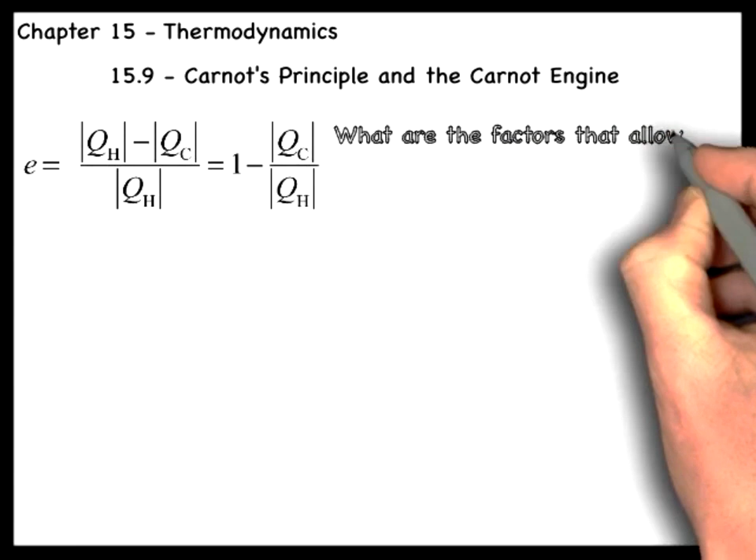In the previous chapter, we saw how to calculate the efficiency of a heat engine. What are the factors that allow a heat engine to operate with maximum efficiency? A French engineer, Sadi Carnot, proposed that a heat engine has maximum efficiency when the processes within the heat engine

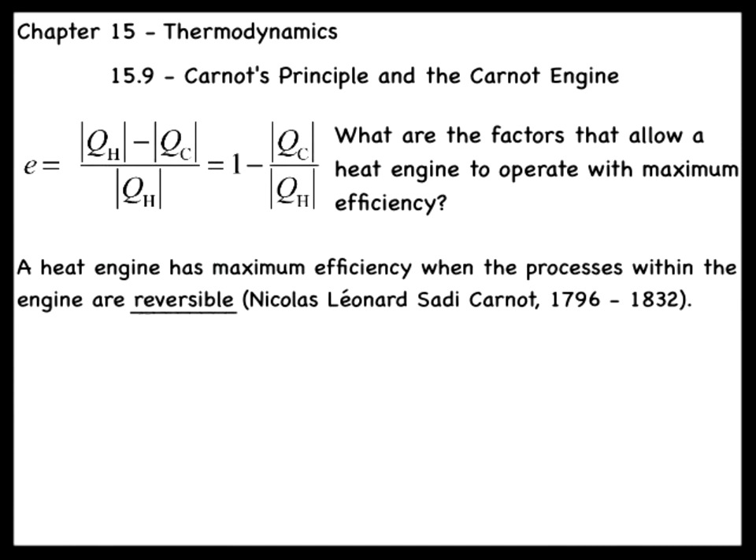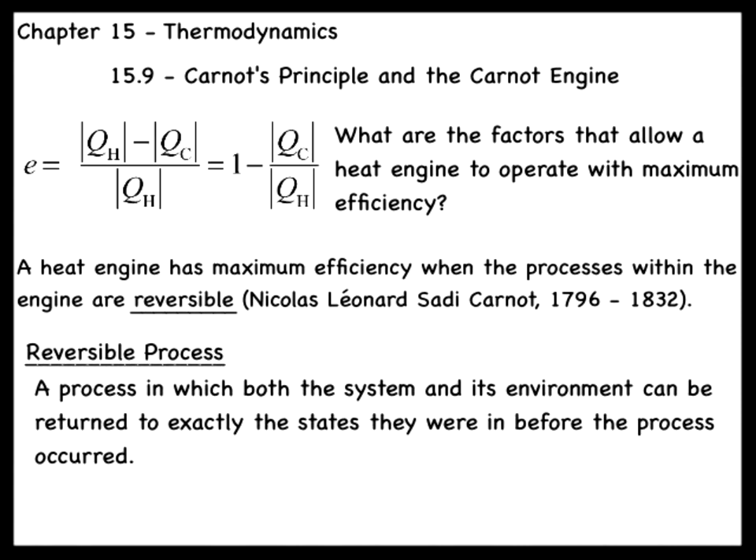are reversible. A reversible process is one in which both the system and its environment can be returned to exactly the states they were in before the process occurred. Therefore, a process that involves an energy dissipating mechanism, such as friction, cannot be reversible, because the energy wasted due to friction would alter the system or the environment or both.

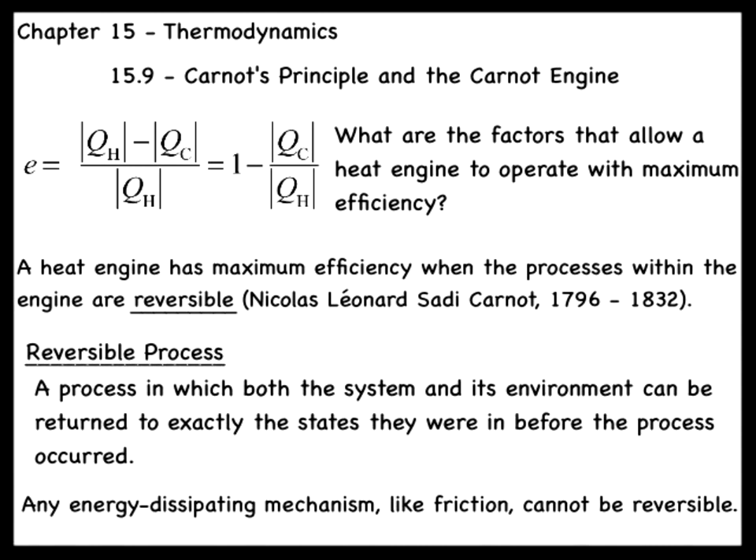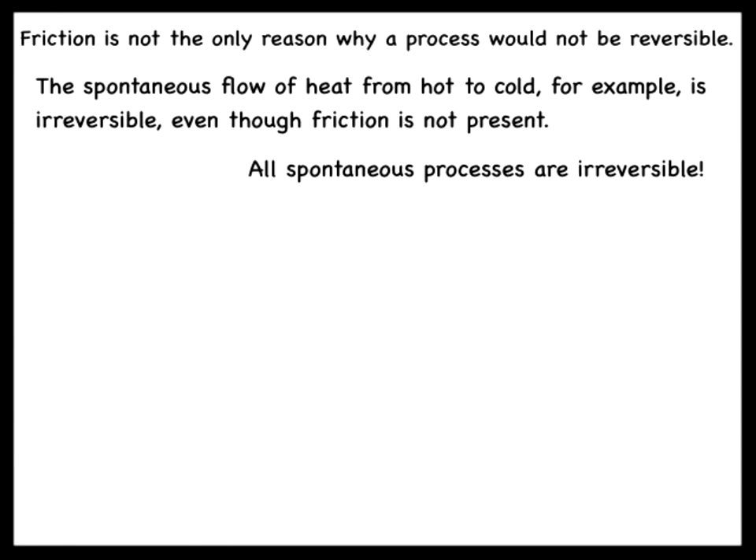Friction is not the only reason why a process would not be reversible. For instance, the spontaneous flow of heat from hot to cold is irreversible, even though friction is not present. In fact, all spontaneous processes are irreversible. An explosion of an unstable chemical and the bursting of a balloon are examples. No automobile engine is thermodynamically reversible, since friction in the engine exists no matter which way the engine runs.

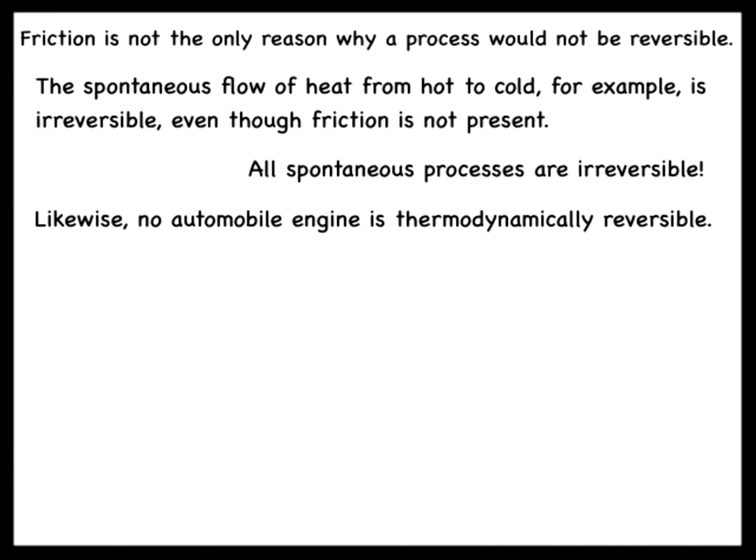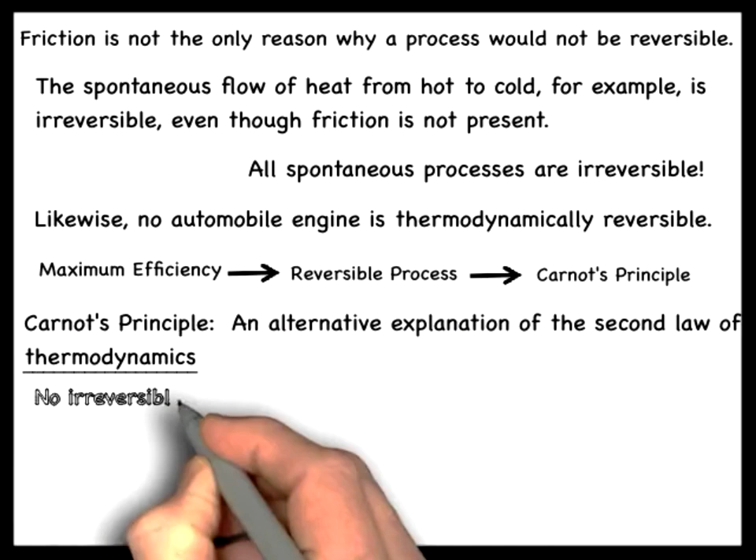The idea that efficiency of a heat engine is a maximum when the engine operates reversibly is known as Carnot's principle, which offers an alternative statement of the second law of thermodynamics. No irreversible engine, operating between two reservoirs at constant temperatures, can have greater efficiency than a reversible engine operating between the same two temperatures. Furthermore, all reversible engines operating between the same temperatures have the same efficiency.

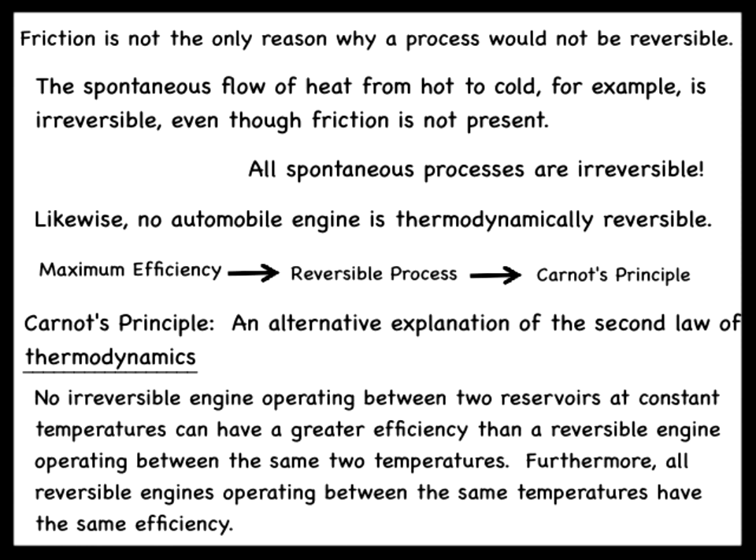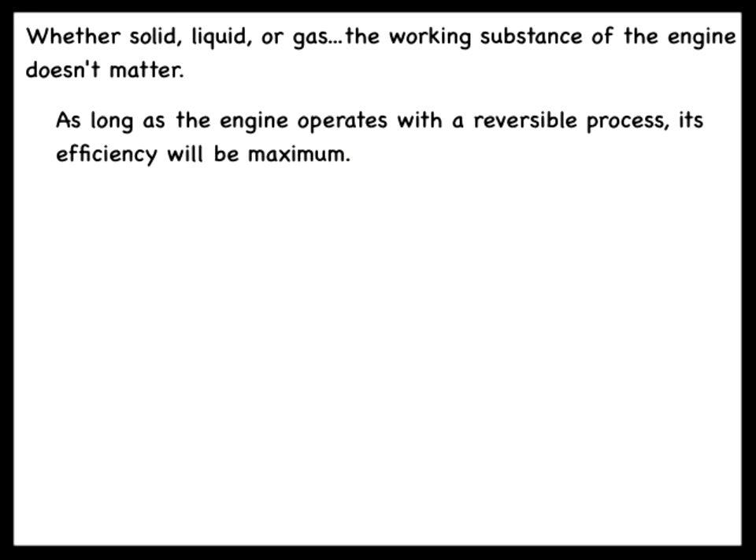Carnot's principle is a remarkable statement. It does not matter whether the working substance is a gas, liquid, or solid. As long as the process is reversible, the efficiency of the engine will be maximum. However, Carnot's principle does not state or even imply that a reversible engine has an efficiency of 100%.

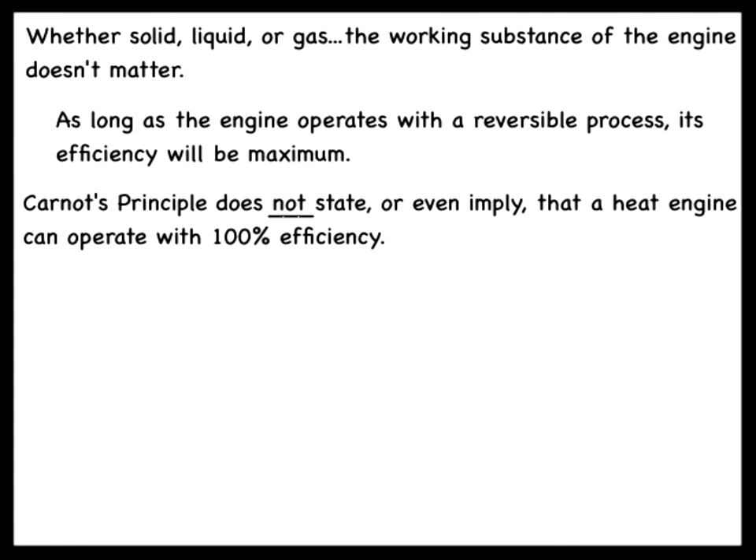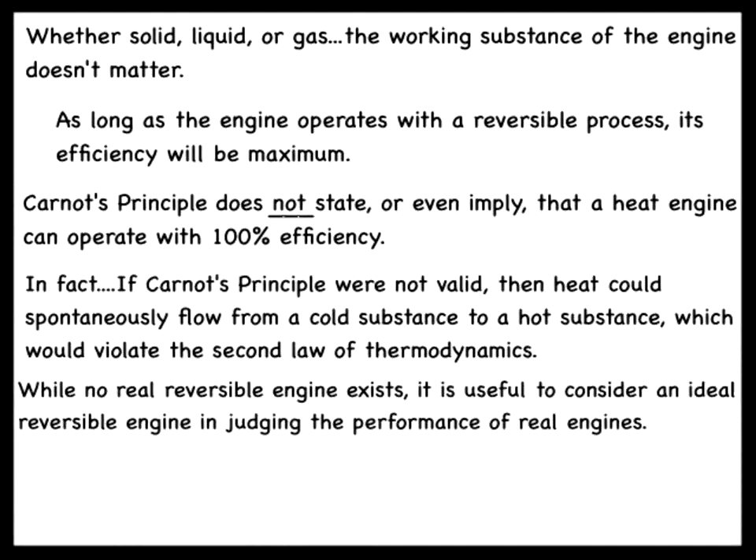It can be shown that if Carnot's principle were not valid, then heat could spontaneously flow from a cold substance to a hot substance, which would violate the second law of thermodynamics. While no real reversible engine exists, it is useful to consider an ideal reversible engine in judging the performance of real engines. The figure below shows a reversible engine, also called a Carnot engine.

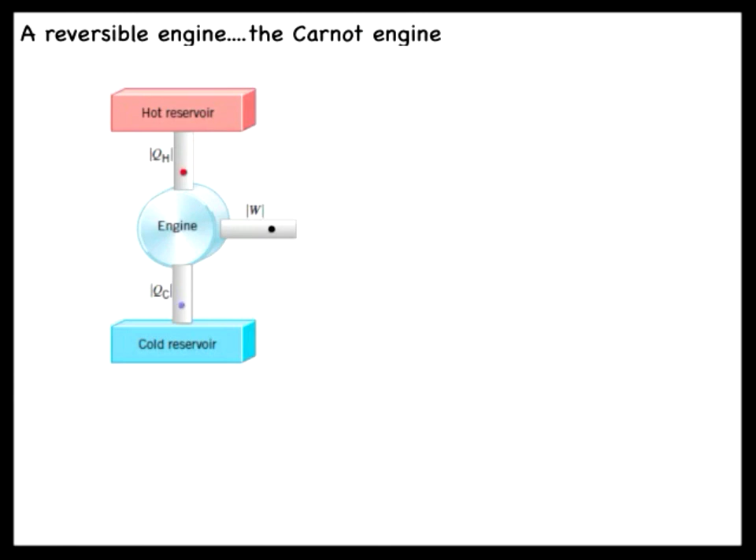An important feature of a Carnot engine is that all the input heat, QH, originates from a hot reservoir at a single temperature, TH, and all rejected heat, QC, goes into a cold reservoir at a single temperature, TC. In other words, none of the input heat is lost to energy dissipating processes like friction.

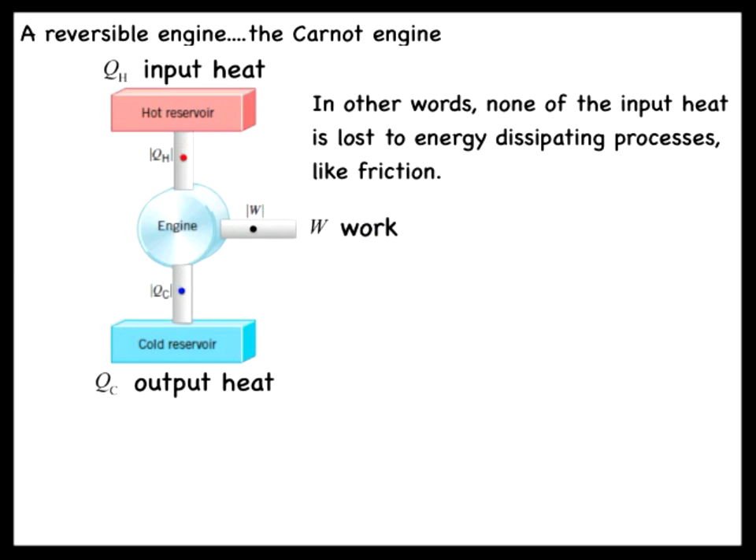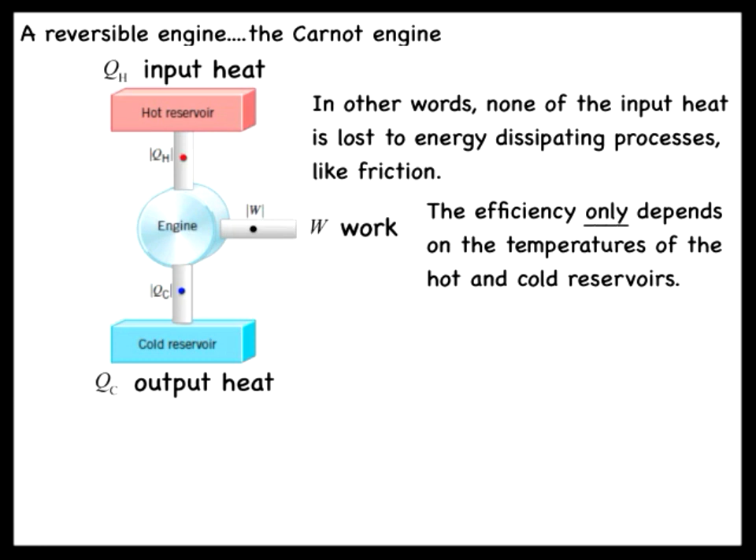Carnot's principle also implies that the efficiency of a reversible engine is independent of the working substance of the engine, and therefore only depends on the temperatures of the hot and cold reservoirs. As we showed earlier, the efficiency of a heat engine is given by the following, where the ratio QC over QH can depend only on the reservoir temperatures.

This observation led Lord Kelvin to propose a thermodynamic temperature scale. In other words, he proposed that the thermodynamic temperatures of the cold and hot reservoirs be defined such that their ratio, Tc over Th, is equal to the ratio of Qc over Qh, where the temperatures of the cold and hot reservoirs are expressed in kelvins.

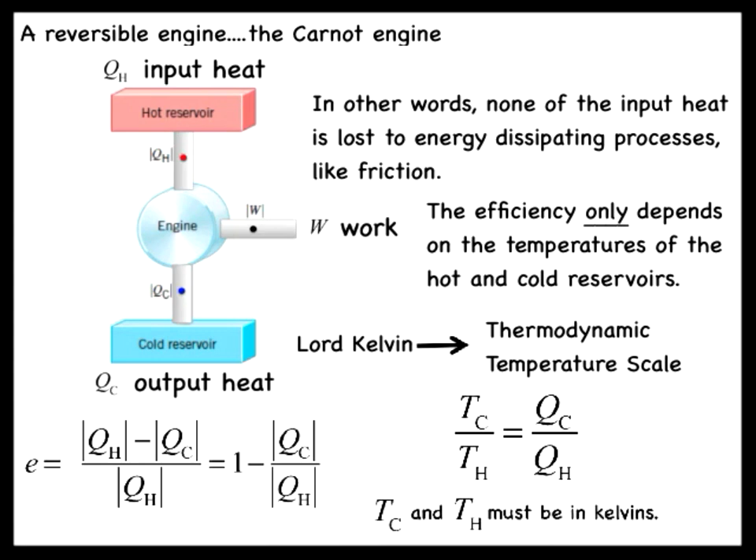Using this result, we can write the efficiency of a Carnot engine in a very useful way. In particular, E Carnot is equal to 1 minus the ratio of Tc over Th. This relation gives the maximum possible efficiency for a heat engine operating between two Kelvin temperatures, Tc and Th.

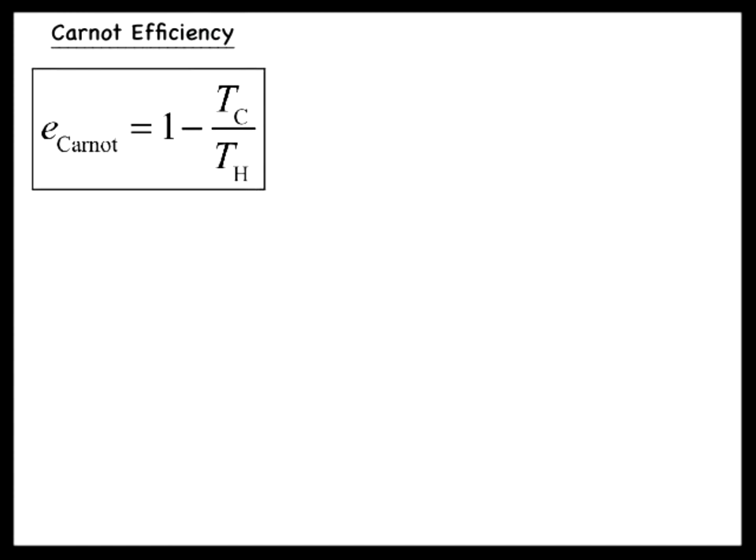Notice that in order for the Carnot efficiency to be equal to 1, or 100% efficient, the temperature of the cold reservoir would have to be absolute 0 Kelvin. However, as we will see later in this chapter, experiments have shown that it is not possible to cool a substance to absolute 0, so that nature does not allow a 100% efficient engine to exist.

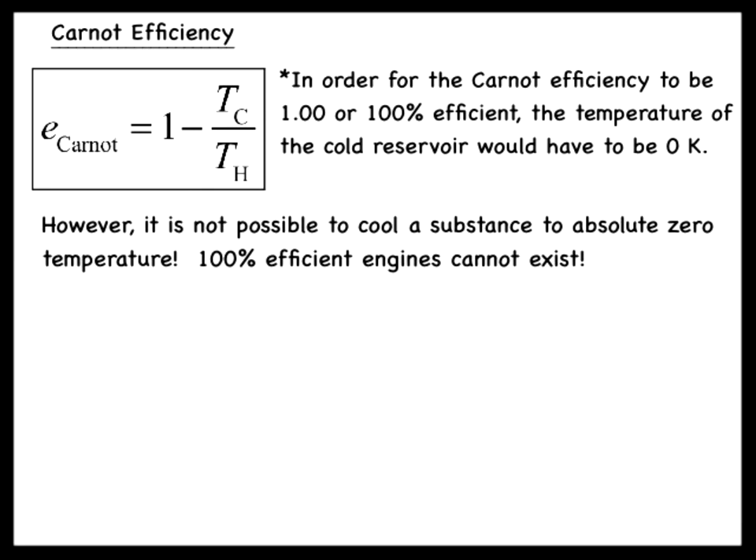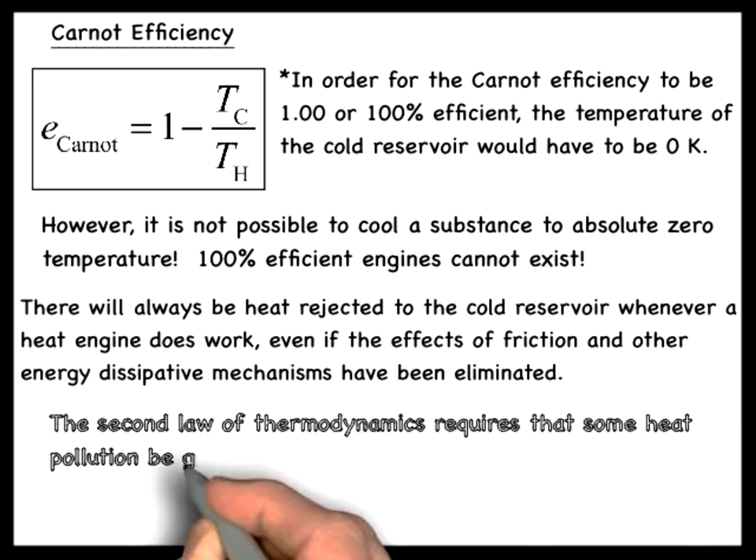As a result, there will always be heat rejected to the cold reservoir whenever a heat engine does work, even if friction or other irreversible processes are completely eliminated. The rejected heat is a form of thermal pollution. The second law of thermodynamics requires that at least some thermal pollution be generated whenever a heat engine does work. There is no way to eliminate this thermal pollution, and it can only be reduced if society reduces its dependence on heat engines to do work.